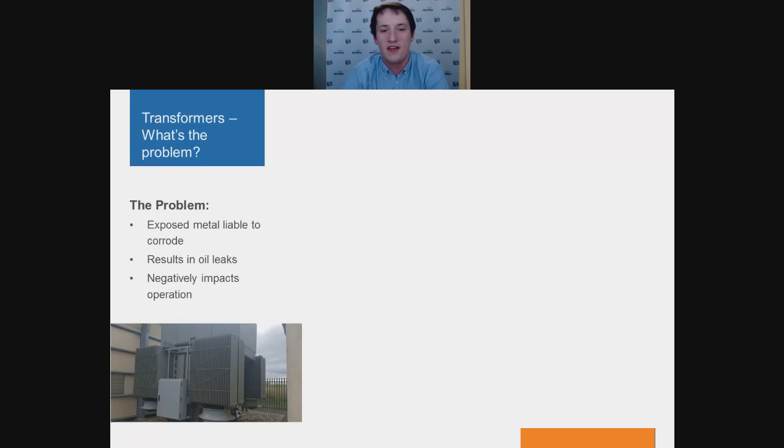So they're found in various locations around the wind farm. Sometimes they're even in the nacelle, they're not always at the bottom. But a common problem with these is transformer oil leaking from the cooling fins. So the metal on these fins is normally protected with a relatively simple paint system, and that's quite easily chipped or damaged.

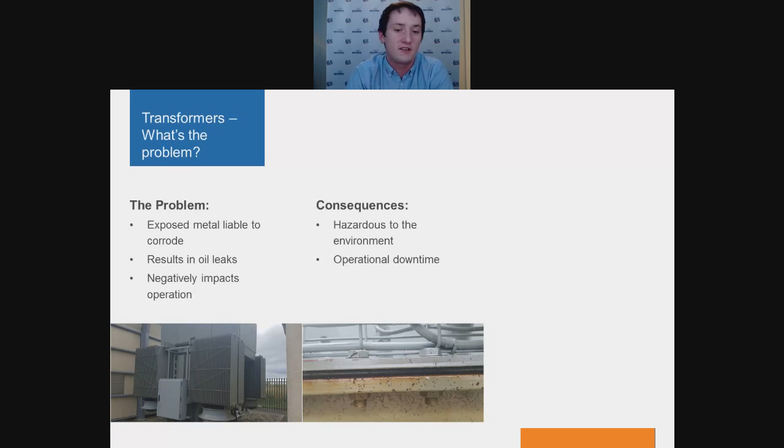And when that happens, that allows the metal underneath to start to corrode. Left unattended, that will eventually go through wall and lead to cooling oil leaking from the transformer. That can lead to overheating of the transformer, which results in inefficient operation, and in the worst case scenario, it could mean the whole turbine needs to be shut down for maintenance.

In terms of alternative repair methods, there's a few options. First, you could take the transformer out of service into a workshop for repair, maybe remove the fin and weld a new one on, or weld some fresh material onto the defective area. Or, the most extreme option, you could completely replace the transformer.

You could take it out and put a brand new one in. And the majority of these methods are costly, not just in materials and labour, but also the amount of time that the turbine is going to be out of action and no longer generating electricity.

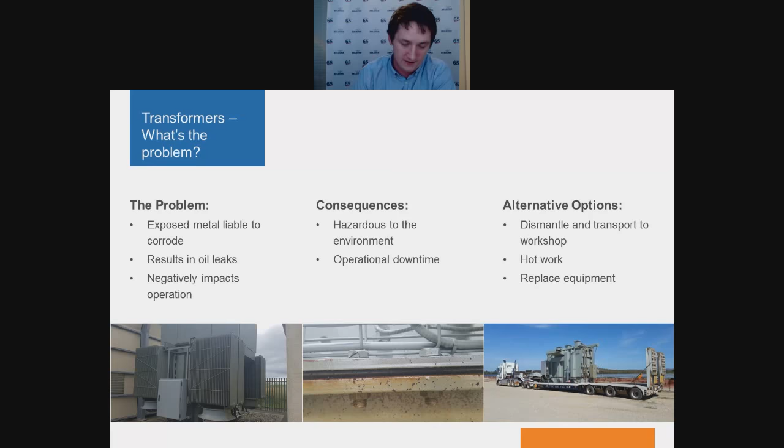So what are the Belzona products that we'll use? The first two we've got here is Belzona 1161 and Belzona 1212. These are both paste grade materials that are designed for rebuilding worn material or bonding a doubler plate on there. And the key difference of these two is the cure time.

So you can see 1212 is a rapid repair. You've got a working life of around 9 minutes, but that also means it's got a faster cure and a faster return to service. The other product we've got here is Belzona 5831.

So this is a coating material, it's a fluid grade, and generally you'd use this after you've rebuilt the lost metal with one of the paste grades, then coat over the top with Belzona 5831. That'll provide corrosion protection and hopefully stop the damage happening in the future.

A feature you might have noticed on all three of these materials is surface tolerance. Surface tolerance means this can be applied even onto wet or oily substrates. The material will displace the fluids, meaning that you can have a much quicker repair and get it back in service as fast as possible.

So what I'm going to do now is hand you back over to Tom, and we'll have a look at a few examples of where we've already done these applications in the field.

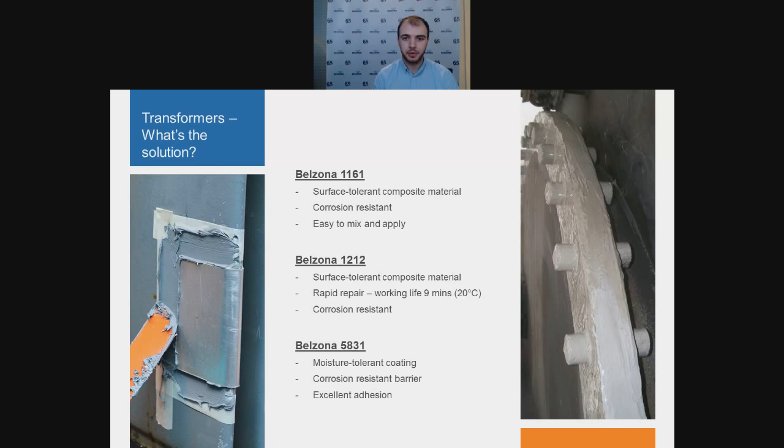As Dan mentioned, I'm going to cover some examples where Belzona has proven a success for repairing damaged transformers. This first case history is from the UK in North Wales. The transformer was leaking oil, which was a major safety concern, as well as an environmental hazard to local farmland.

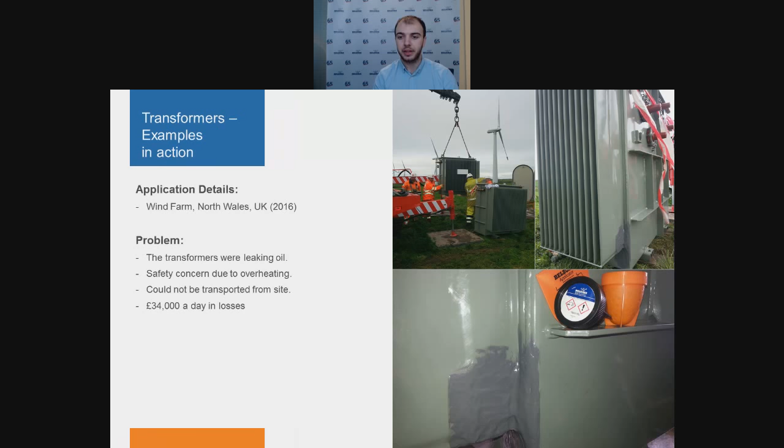The client's original option was to replace with a new transformer, as it couldn't be transported from site for any repairs. Overall, however, this meant that having the transformer out of action had a knock-on effect of £34,000 worth of losses every day. So it was quite a loss that they were making.

As a result, they needed a quick solution, and in this they turned to Belzona 1212, a rapid repair surface tolerant solution. This meant minimal downtime for the client as well as maximum protection for the environment.

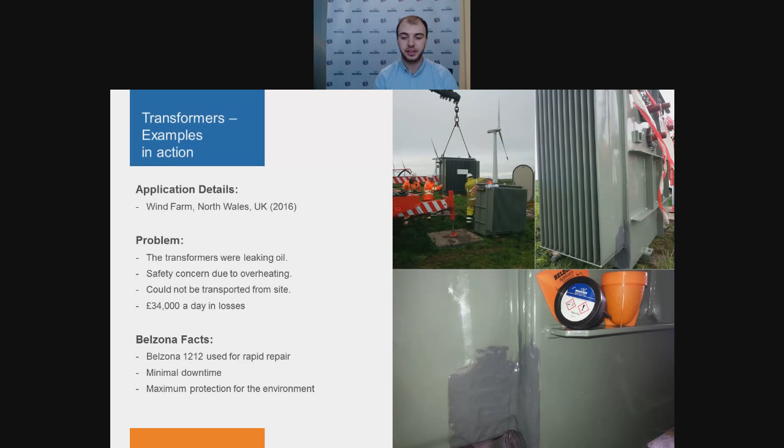So this is another example from a wind farm in the UK. The farmer who leased the land for this wind farm would still graze his sheep in the field. The sheep found that the transformer fins worked very well as a back scratcher.

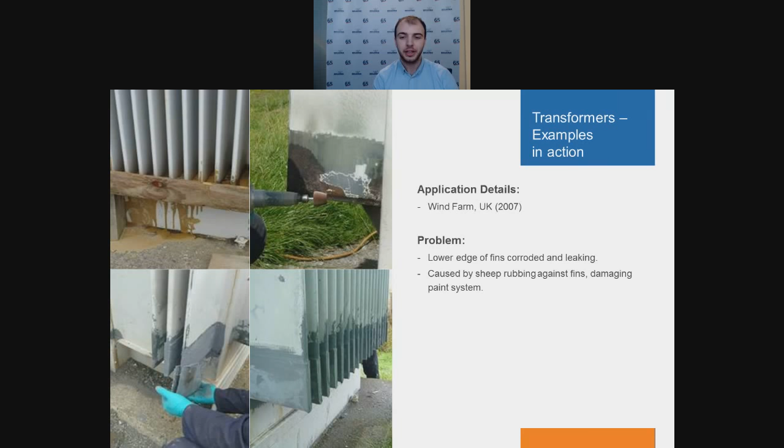Now, whilst this was great for the sheep, it wasn't very good for the transformer's original coating. This wore away the protection, exposed the fins to the elements, and they began to corrode and leak oil. The client had tried a makeshift alternative, but this still didn't solve the problem.

So Belzona 1161, another one of the surface-tolerant solutions Dan mentioned, was chosen. For this, it was used to bond doubler plates onto the area, stopping the leak. Overall, a quick and simple repair that meant a fast return to service for the wind turbine.

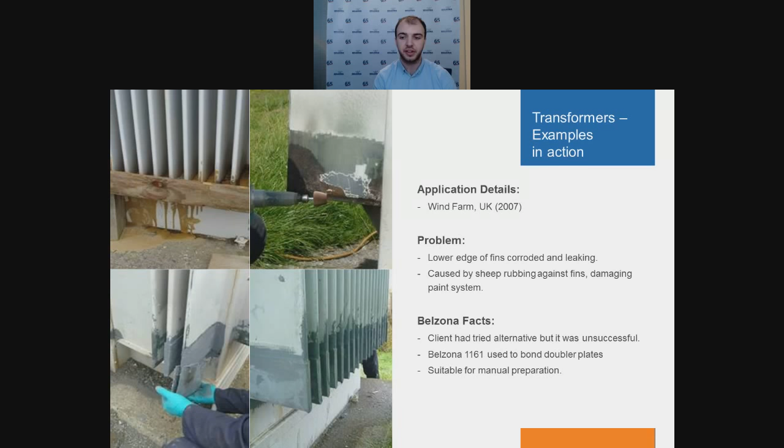I'll now hand you back over to Dan, who's going to cover our second section on shafts.

Thank you, Tom. So now we're going to move up the turbine into the nacelle. And one of the most common components here is going to be the shafts. Any piece of rotating equipment needs to convert that rotational kinetic energy into electrical.

So the most common cause of damage on shafts is wear, generally from imprecise alignment or a lack of lubrication. In some cases, such as the picture you can see there, a lack of grounding led to electrolysis and caused that pitting effect you can see in the image.

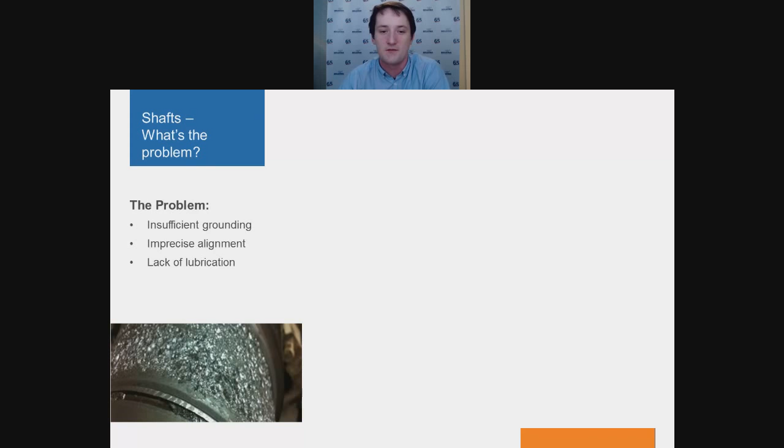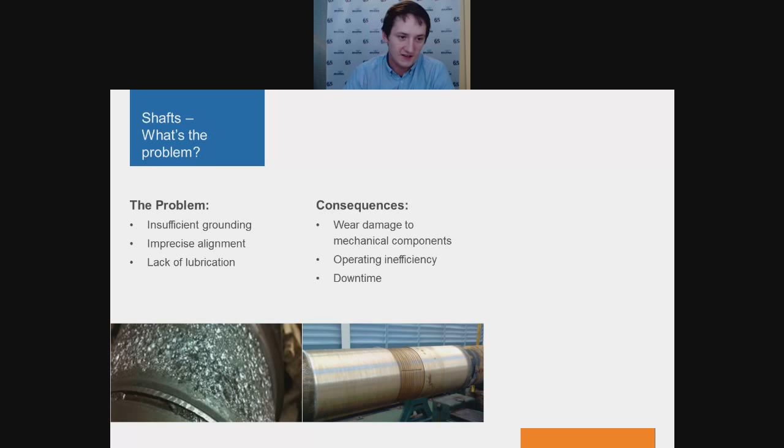So this wear will lead to mechanical damage on the extra components. An imbalanced shaft will damage everything that is connected to it. And a less extreme case of that is simply it just won't work as efficiently as normal. Ultimately, what all this leads to is the turbine being out of action, downtime, and a loss in revenue.

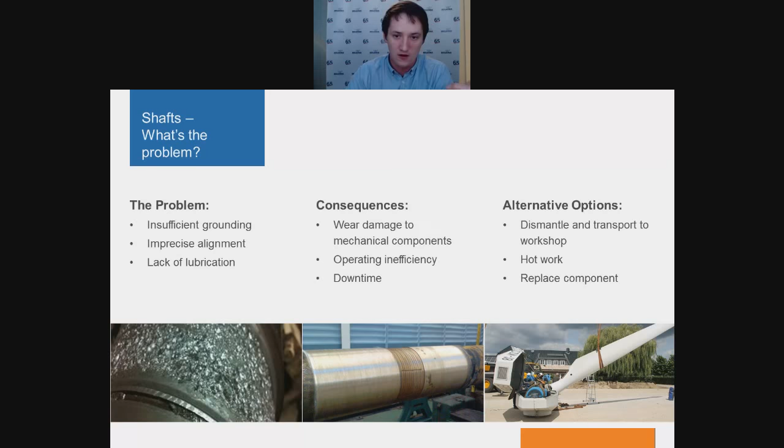So your alternative options are generally to dismantle the nacelle, take the shaft out of action, take it to a workshop, maybe weld some new material on there, machine it back down to its original dimensions, or in some cases you could just completely replace the shaft with a brand new one. One of the drawbacks of most of these methods is it means you have to take that shaft completely out of all the different components it's attached to and take it down to the workshop. The Belzona alternative can be done in situ.

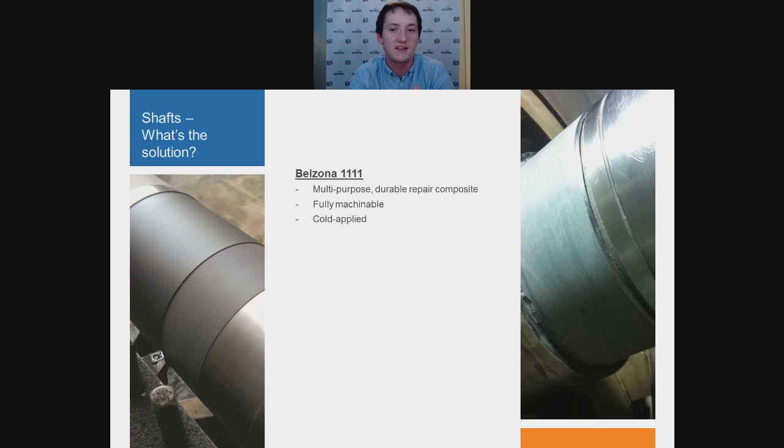So we've got a variety of materials for these. The first one is Belzona 1111. This is the product you're most likely to have seen before if you're not as comfortable with all the products we have. This is a multi-purpose two-part epoxy designed for rebuilding corrosion wear, or in this case on the shaft. It can be used to bond plates on. It's a very, very versatile material.

Then the other material we've got here is Belzona 1111's sister product, Belzona 1131. So this is very similar.

Again, it's a paste grade material that can be applied in situ to rebuild the shaft. But this one has self-lubricating properties, so it's got a very low friction surface, should that be required for the service.

Then the final material we've got here is Belzona 1321. Most of you might know that as an erosion resistant coating, but it can also be used to rebuild the shaft. So this is a fluid grade material that can be injected into the area, rebuilt using a former, and the ceramic filled system allows for high compressive strength as well as providing long-term corrosion protection.

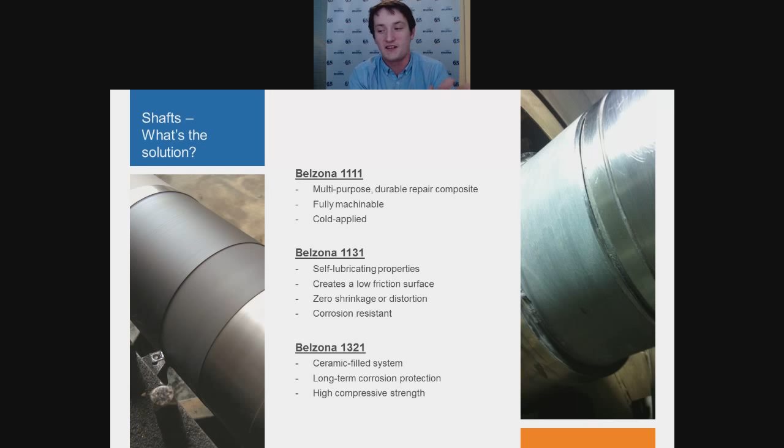So you might be asking yourself, how on earth do you rebuild a shaft using a fluid grade material? Well, we've got a video for you.

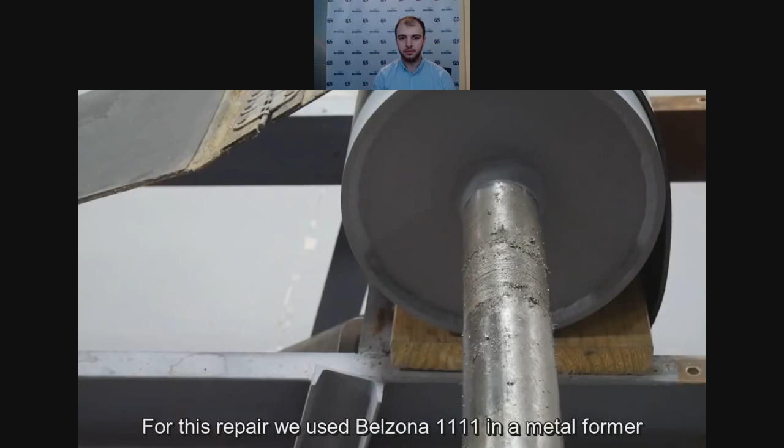In this video, we'll be demonstrating how to rebuild a damaged shaft using forming techniques. For this repair, we use Belzona 1111 in a metal former manufactured with an outside diameter slightly larger than the diameter of the shaft. First, we clean the damaged area of the shaft.

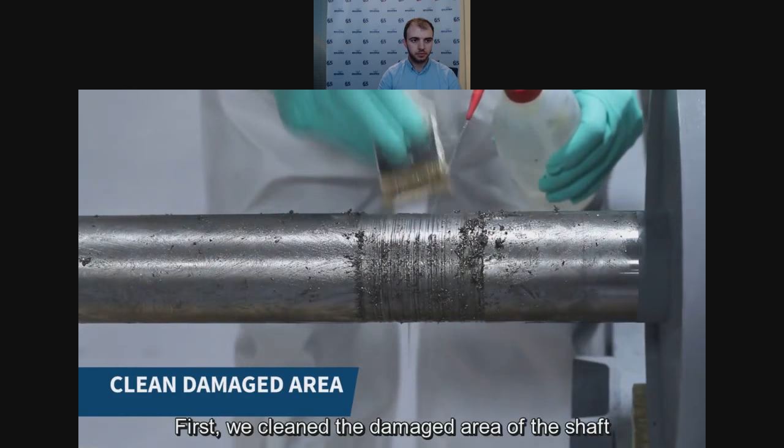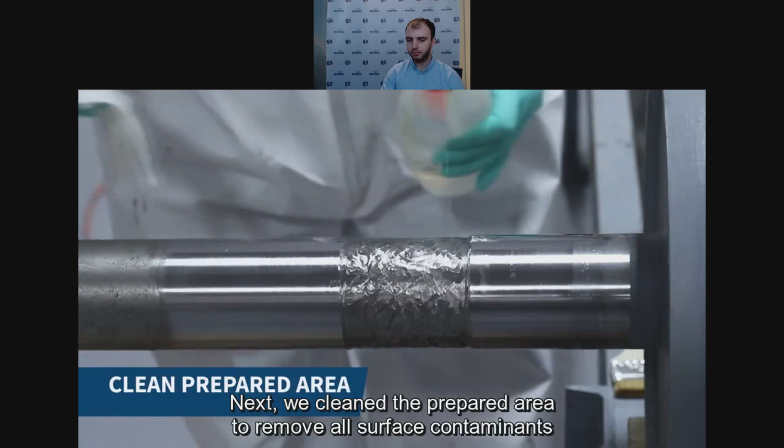We undercut the repair area and roughen the profile with a grinder. Next, we clean the prepared area to remove all surface contaminants.

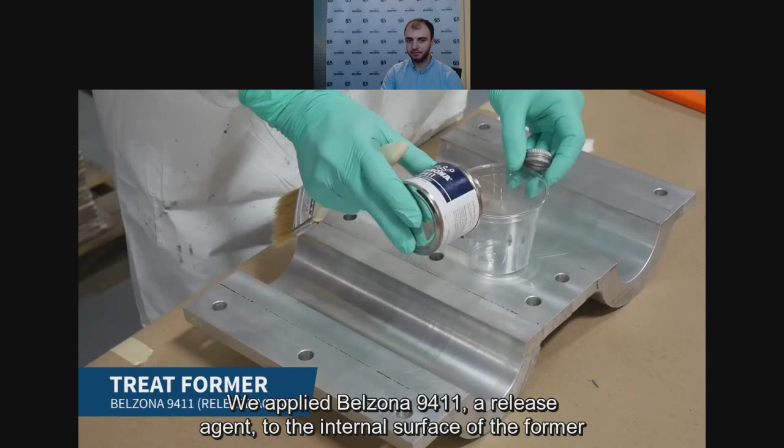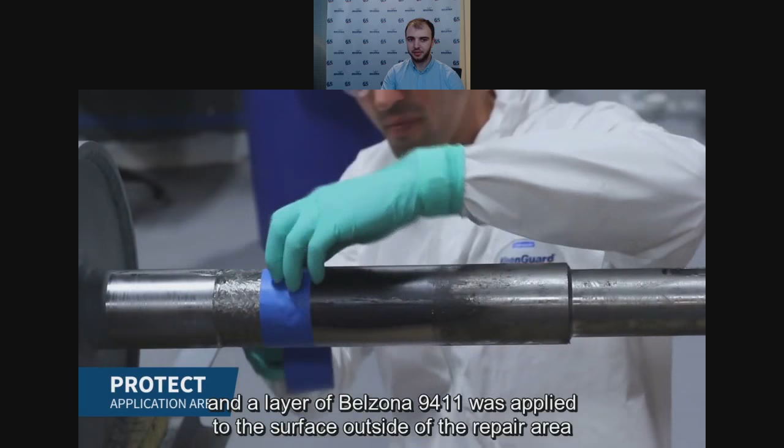We applied Belzona 9411, a release agent, to the internal surface of the former. The repair area was then taped off and a layer of Belzona 9411 was applied to the surface outside of the repair area.

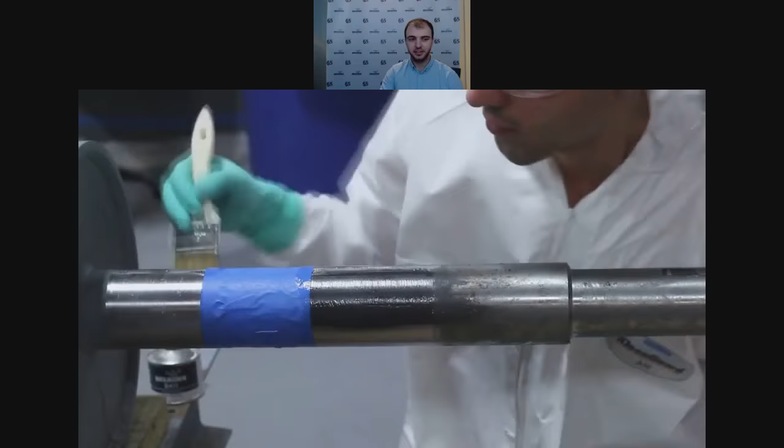Then we removed the tape and mixed Belzona 1111 until a uniform material was achieved. The internal surface of the former was wetted out with Belzona 1111.

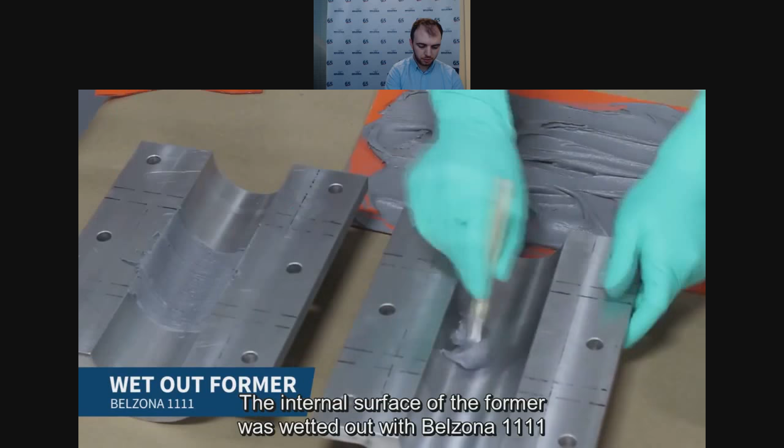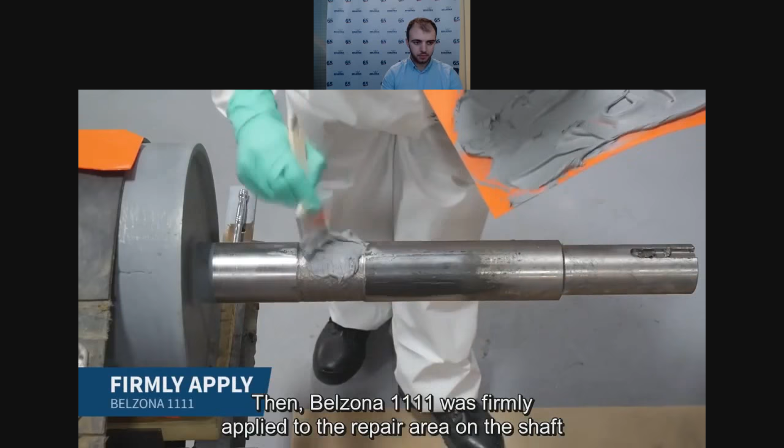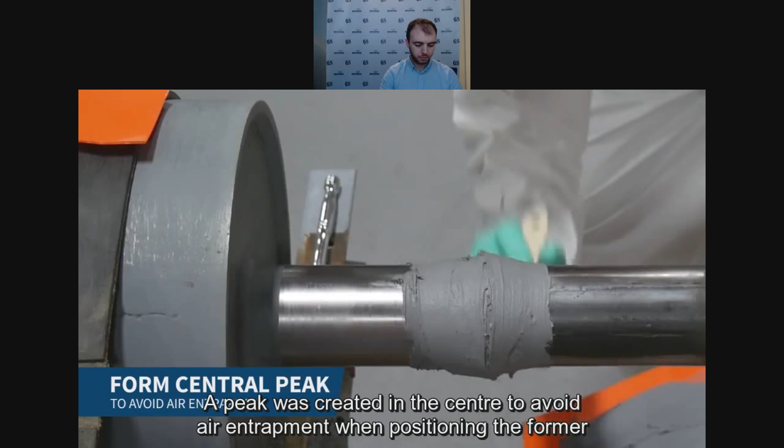Then Belzona 1111 was firmly applied to the repair area on the shaft. A peak was created in the center to avoid air entrapment when positioning the former.

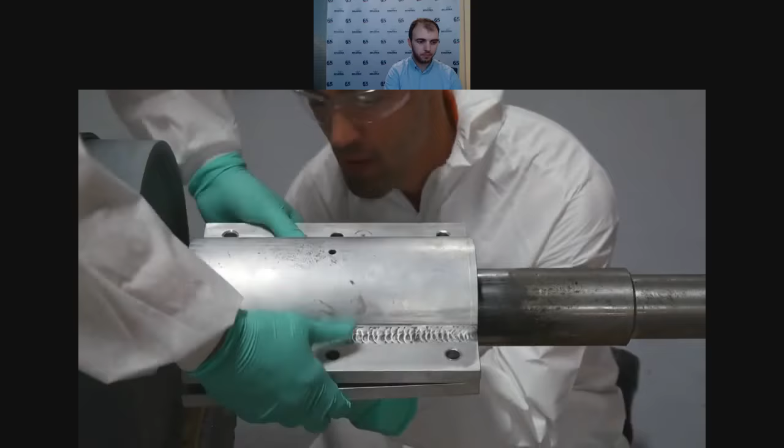Next, we positioned both parts of the former and secured them with bolts. The bolts were tightened to allow excess Belzona product to exude out.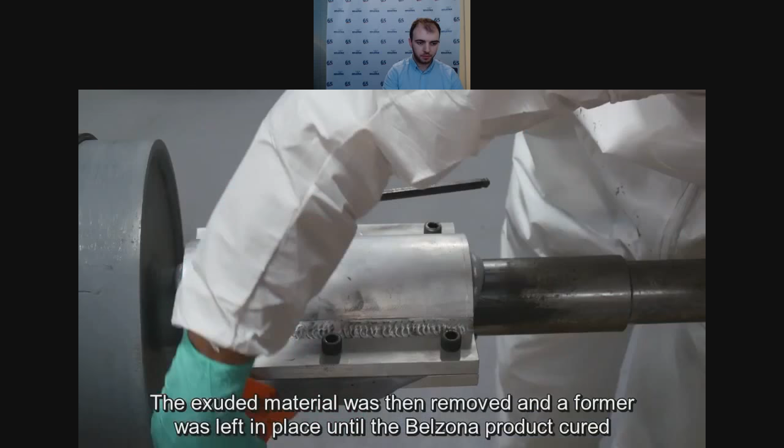The exuded material was then removed and the former was left in place until the Belzona product cured. Once the product was cured, we removed the bolts and the former.

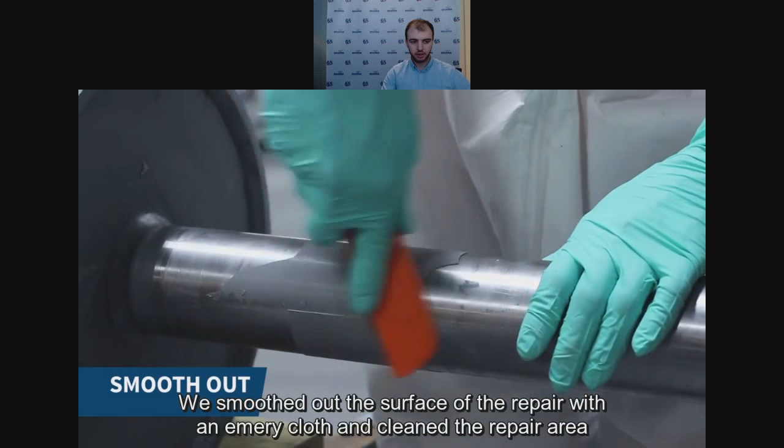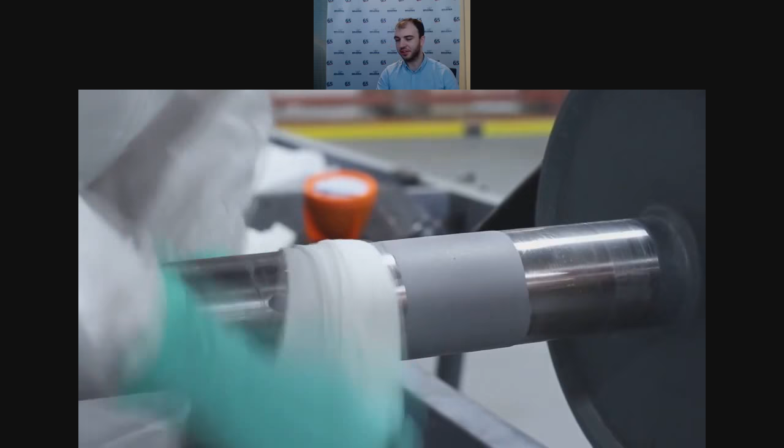We smoothed out the surface of the repair with an emery cloth and cleaned the repair area. Our rebuilding solutions for damaged shafts offer simple applications by reducing hot work and cutting downtime.

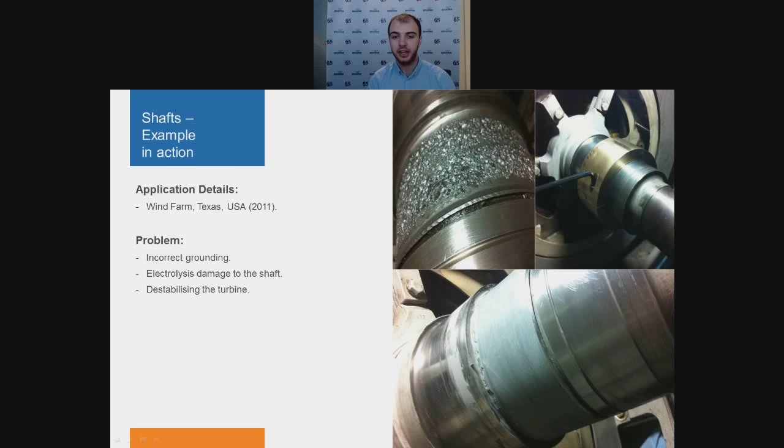So the client used Belzona 1111 and repaired the shaft in situ. Due to the cold curing properties and easy application of this material, dismantling the nacelle was avoided, and approximately $250,000 worth of savings were noted with this simple repair option.

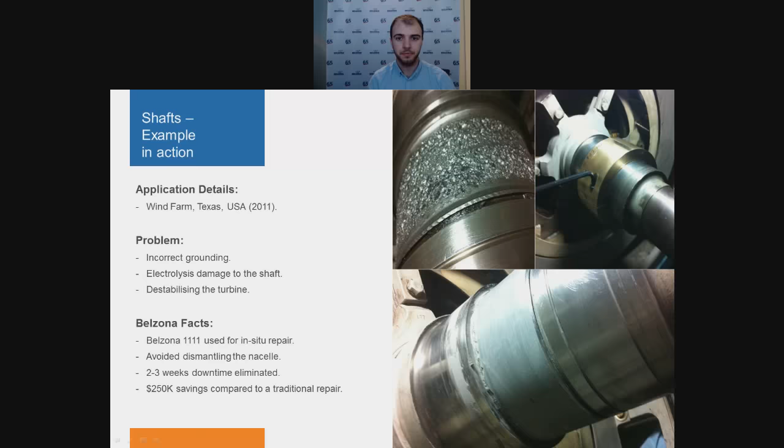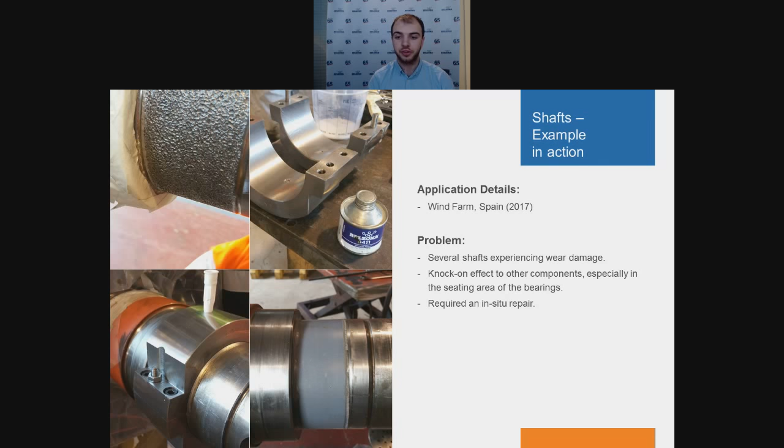In this instance, the customer had the ability to bring the equipment down for much needed maintenance. Rather than employing any hazardous hot work, Belzona was applied via injection, and what the client did afterwards is they used several different molds for all the shafts that they had in their turbine.

So for each of the varying diameters, they were able to inject into the specific mold for each one and reform the shaft to its original dimensions. The customer has a selection of different molds suitable for all shapes and sizes in the turbine and can complete the repair even quicker and simpler than ever before.

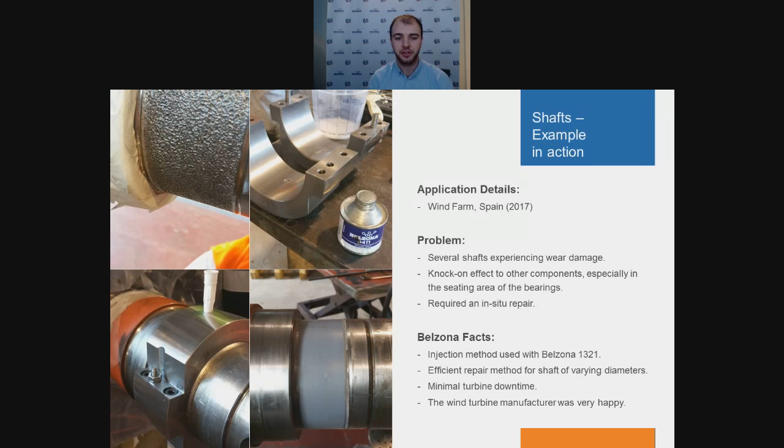So our final application we're going to talk to you about is my favourite part of the turbine, the blades. Although the turbines themselves don't spin overly quickly, normally in the region of 10 to 20 RPM.

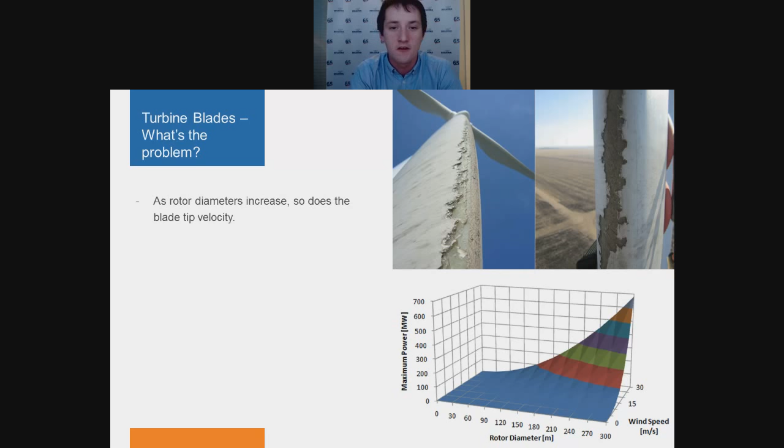The length of the blades means that the tips are travelling extremely quickly. In some cases this is up near the 200 miles an hour mark, and this is only going to get faster as the turbines get bigger.

The speed of these and the impact of water can cause significant leading edge erosion or damage on the blades, as you can see in those two pictures there. This damage causes a loss in the aerodynamic efficiency of the blades and consequently a loss in production. The effects of this can be seen after as little as 2 years sometimes.

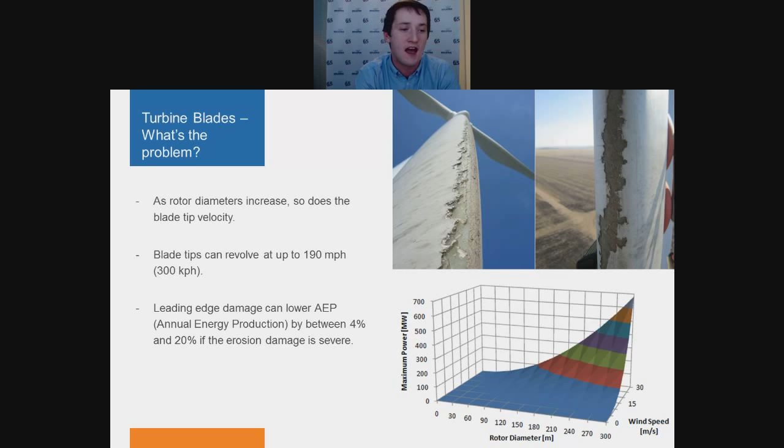The main effect is that this lowers the annual energy production, sometimes by as much as 20% if the damage is really severe. You could even argue it's 100% if the damage is bad enough to cause the blade to split.

There are various different materials used to repair, rebuild and protect these blades. Quite often they'll involve primers, multiple coats, sometimes UV lamps, tapes, various different methods. There's a lot of different products out there to rebuild them.

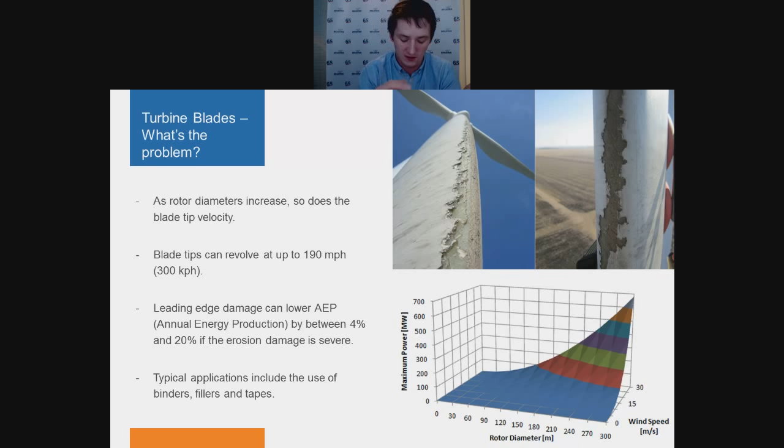When you're looking for leading edge protection, you're looking for two things. First, performance - does it stop the erosion? Both of these materials have been through extensive in-house testing, but also external erosion testing, including the ASTM G73 rain erosion test.

In addition to this, we've got a lot of case histories and examples where we've used these materials in very erosive environments, such as cooling tower fan blades and high velocity pumps. But we also have examples where these have been used in the wind industry on blades.

They both have excellent adhesion onto the GFRP. In most cases, when we do an adhesion test, the GFRP will break cohesively before the Belzona materials come off adhesively. The other important benefit you want from your leading edge protection is ease of application.

Both of these materials are very easy to mix, simply in a bowl, and they can both be applied by hand with just a brush. The other point to mention about these is the application window.

These aren't moisture sensitive and will cure on their own without any need for external heating down to 5 degrees. This allows a faster return to service, increases your application window, but also increases the time over the year that you can get up there and do maintenance.

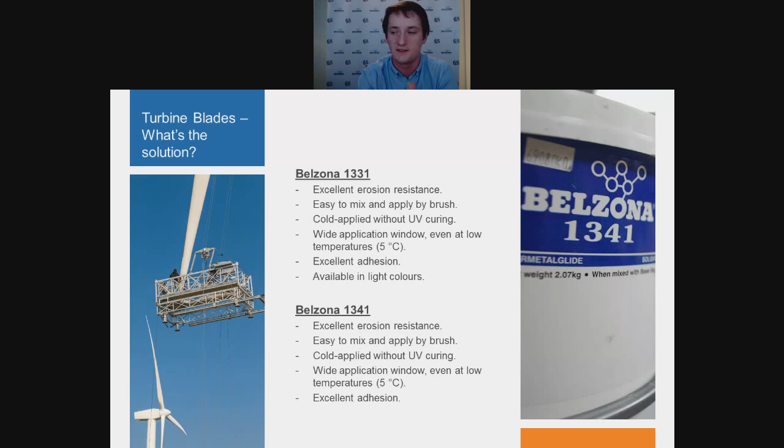So I'm going to pass you back over to Tom now for a quick video on rebuilding the blade.

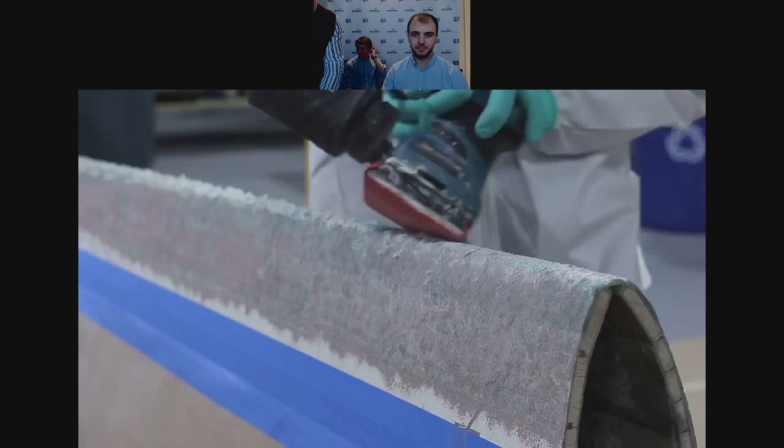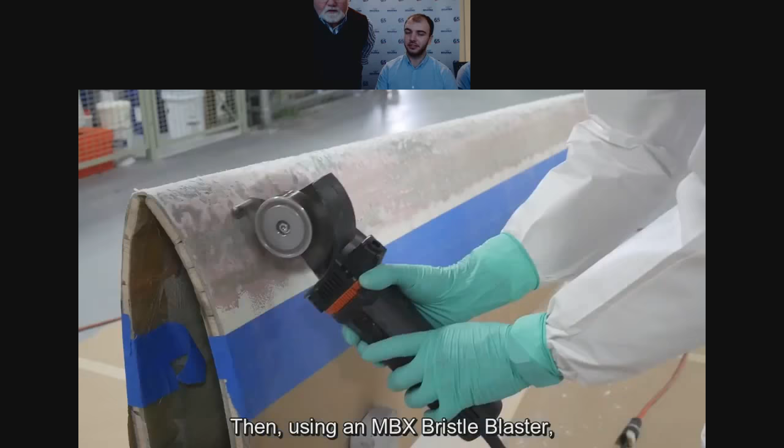First, we sanded down the damaged area and removed the remaining coating and all the loose particles. Then, using an MBX bristle blaster, we cleaned the entire repair area, removed the dust with a brush, and degreased the area to remove all surface contaminants.

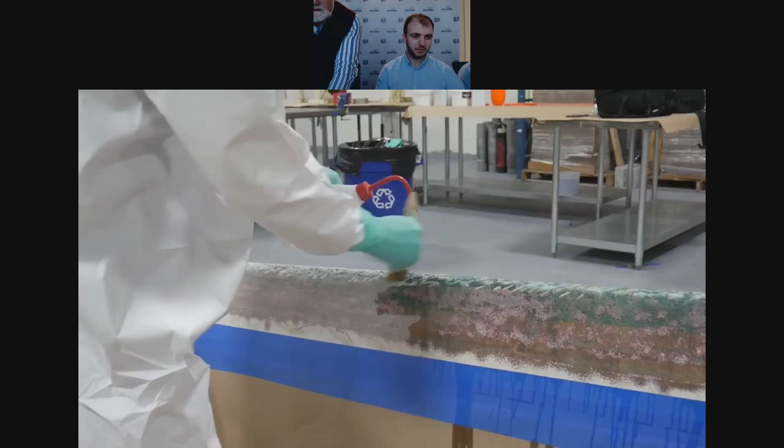We mixed Belzona 1121 until a uniform material was achieved.

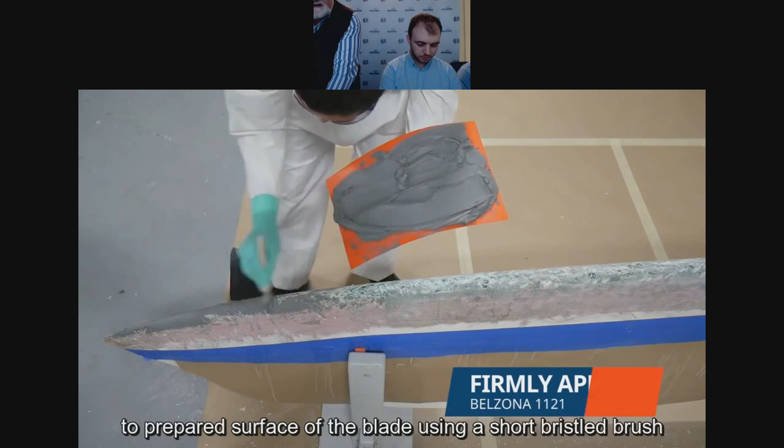A layer of Belzona 1121 was firmly applied to the prepared surface of the blade using a short bristle brush. Next, an applicator was used to obtain a smooth finish.

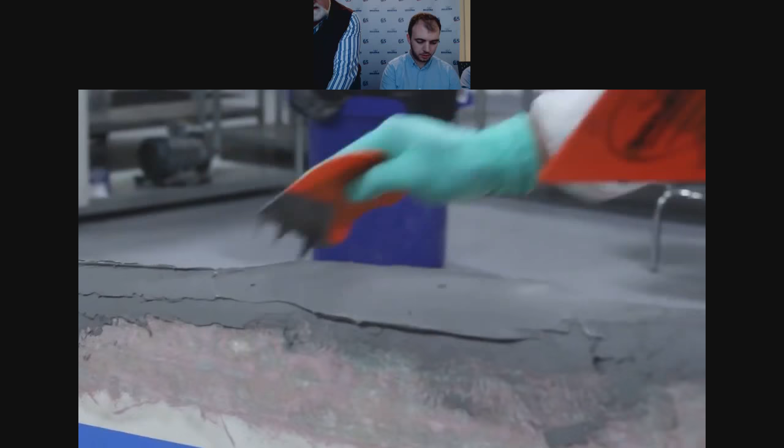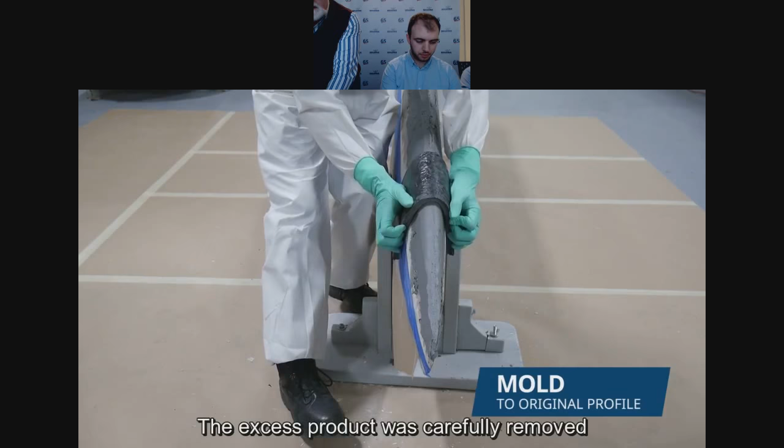The excess product was carefully removed with a pre-formed mold. A smaller form was used to smooth out the blade's leading edge.

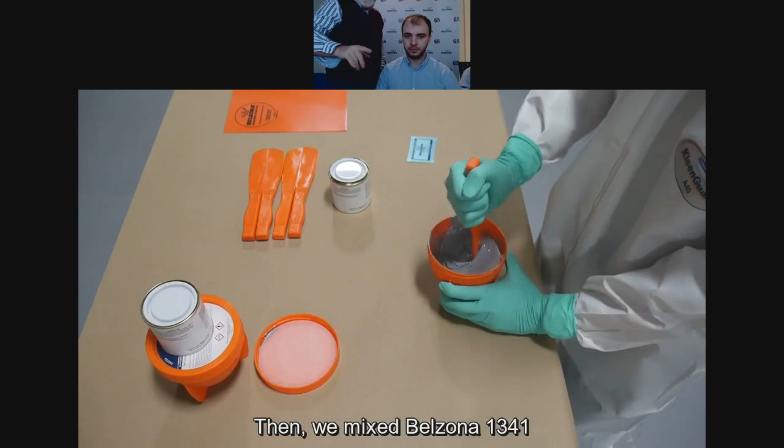Then, we mixed Belzona 1341 until a uniform color was achieved. A layer of the mixed Belzona 1341 was applied on top of the cured Belzona 1121.

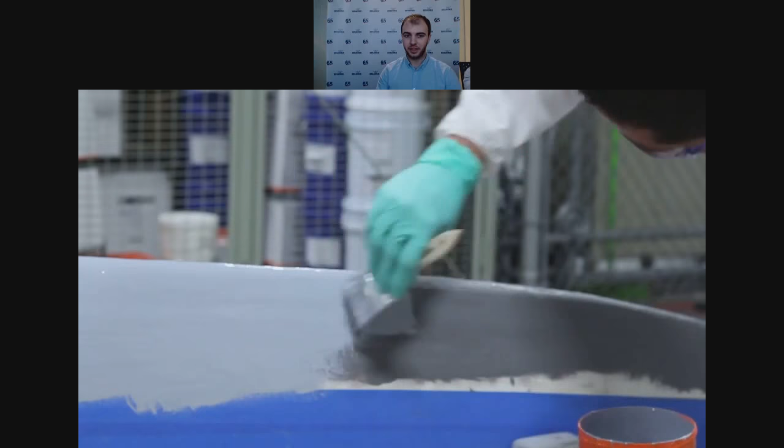Using a thickness gauge, we measured the thickness of the Belzona 1341 coat to ensure it was applied evenly within the recommended parameters.

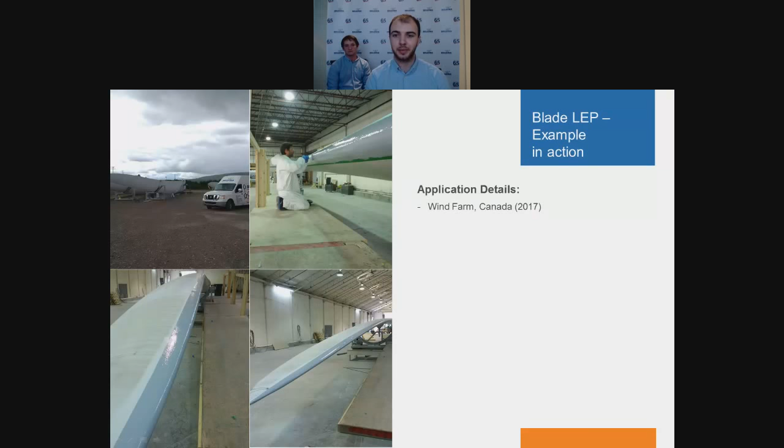So the leading edge on these blades had started to show signs of deterioration, and the asset owner wanted a preventative solution to stop the effects of rain and environmental erosion. This damage was compromising the performance, energy output, and overall life expectancy of the turbine. The customer had previously used a competitor leading edge coating, but this was found to be both difficult to apply and hadn't performed very well in service. So in this instance, the blades were brought down, the pitting was resurfaced, and Belzona 1341 was chosen to provide leading edge protection for the blade.

Versus the previous option, Belzona 1341 was easily applied by brush, reducing the time taken to complete the application. Overall, Belzona offered them durability and performance that would eventually save them money in the long run.

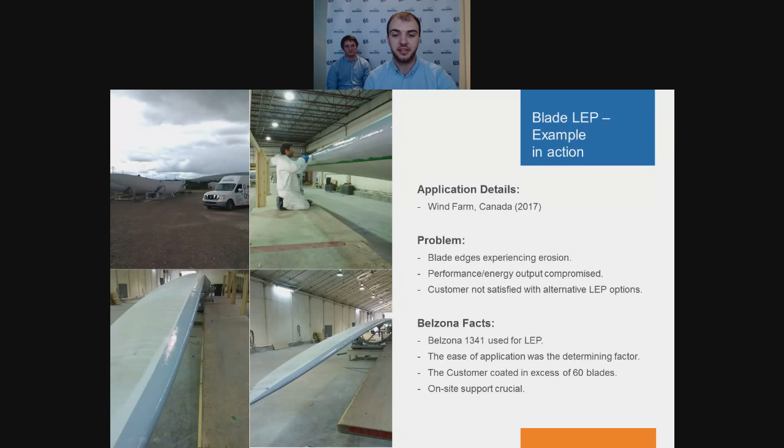This example actually won our Know How in Action competition in North America and Latin America last year, and I think the distributor who submitted this is in attendance today as well.

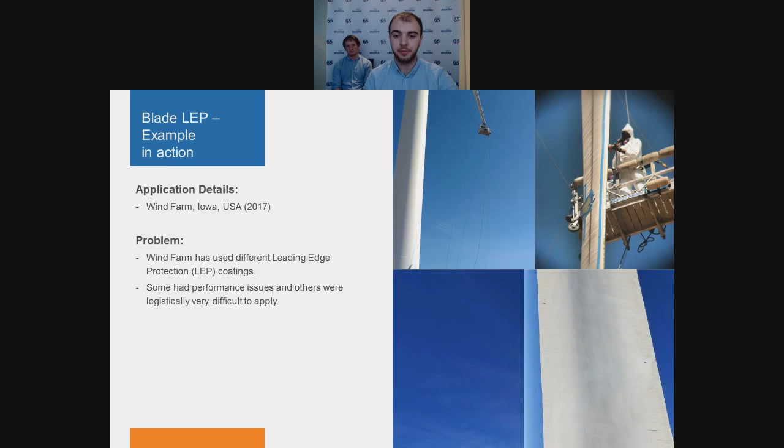Which leads us on to another benefit of Belzona, in that it wouldn't need to be reinstated along the entire length of the blade. If there was a need for part of the coating to be repaired, it could be done in a small patch repair.

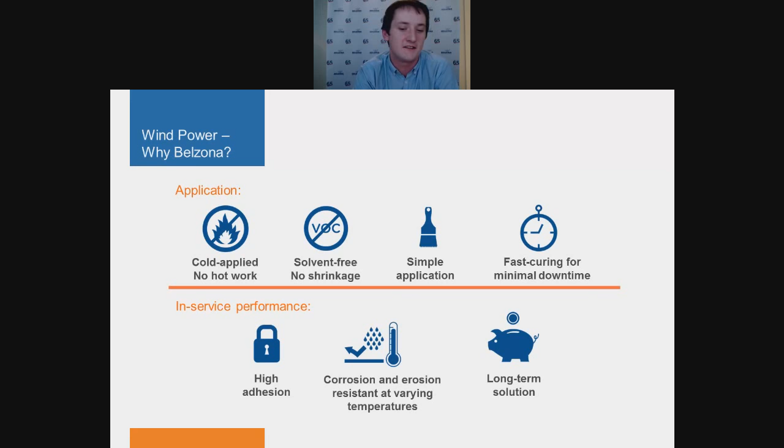And the final point to make on these is that they're long-term solutions, not just quick fixes. For all the examples we've got here and many more, we've got case histories of proven performance where they've lasted for many, many years and are still in service in most cases.

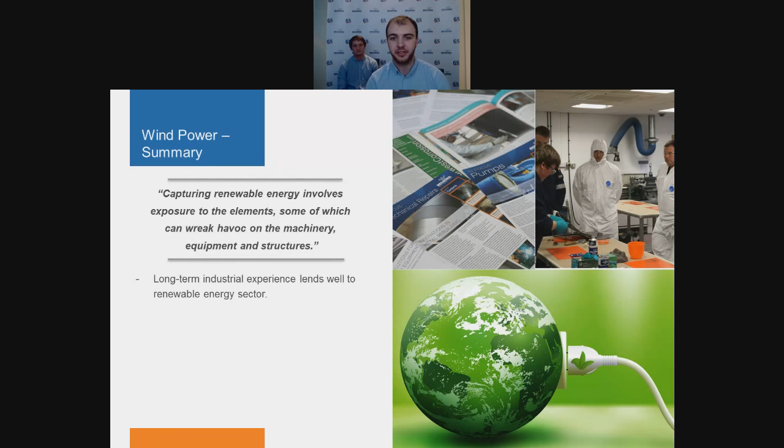Okay, so that brings us to the end of our presentation. We have touched on just 3 of the application areas Belzona can carry out in the wind power industry, but there are still many more which Dan briefly covered at the start. All of these systems have been tried and tested and have significant in-service experience from a variety of different industries and aggressive conditions.